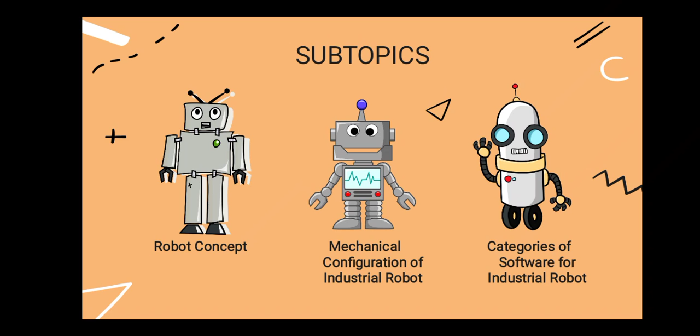Subtopics we will cover: robot concept, mechanical configuration, and categories of software for industrial robots.

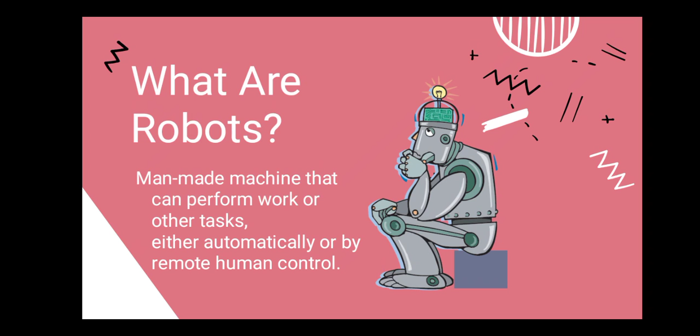First, let's talk about the concept of robots. What are robots? Robots are man-made machines that can perform work or other tasks, either automatically or by remote human control. It is also defined as a type of automated machine that can execute specific tasks with little or no human intervention and with speed and precision.

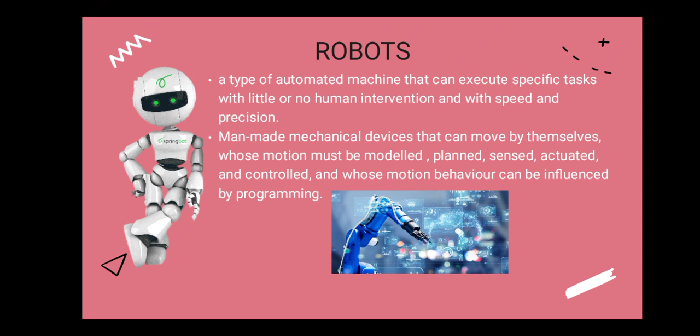Moreover, it is also defined as man-made mechanical devices that can move by themselves, whose motion must be modeled, planned, sensed, actuated, and controlled, and whose motion behavior can be influenced by programming.

Robotics is the science and study of robots. It is an interdisciplinary sector of science and engineering dedicated to the design, construction, and use of mechanical robots.

What is a motion control system? At the most fundamental level, a motion control system is any system that controls the energy flow to generate mechanical motion with some desired properties.

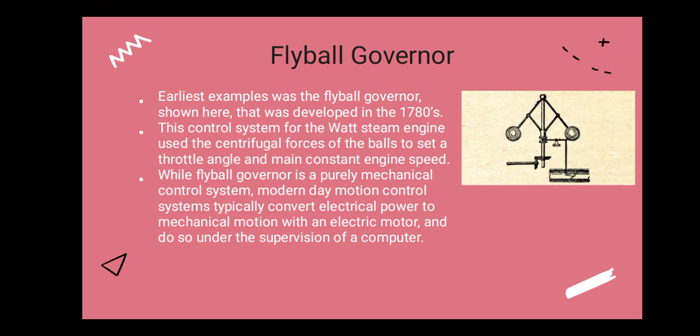The earliest example was the flyball governor developed in the 1780s. This control system for the Watt steam engine used the centrifugal forces of the balls to set a throttle angle and maintain constant engine speed. While the flyball governor is a purely mechanical control system, modern-day motion control systems typically convert electrical power to mechanical motion with an electric motor, under the supervision of a computer.

Now let's talk about the history of robots. In 1920, the word robot was invented by Karel Čapek. The word robot comes from the Czech word robota, which means forced work or labor.

So in 1920, the word robot first appeared in the drama written by Karel Čapek. The name of the drama is RUR, abbreviation for Rossum's Universal Robots, a company which plays a prominent role in the story.

The word robotics was first used in Runaround, a short story published in 1942 by Isaac Asimov. Isaac Asimov also proposed the three laws of robotics, and later added a zeroth law.

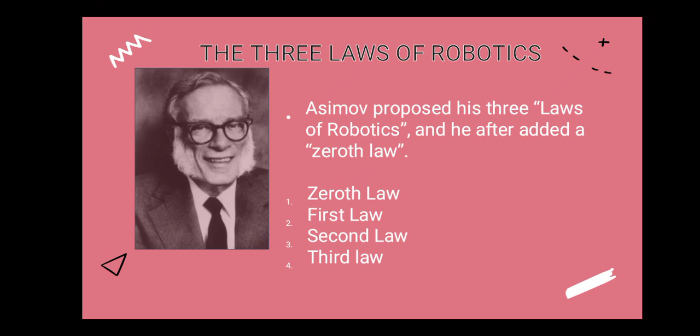Let's define these laws further. The three laws of robotics: first, the zeroth law - a robot may not injure humanity or, through inaction, allow humanity to come to harm. First law - a robot may not injure a human through action or inaction allow a human being to come to harm, unless this would violate a higher order law.

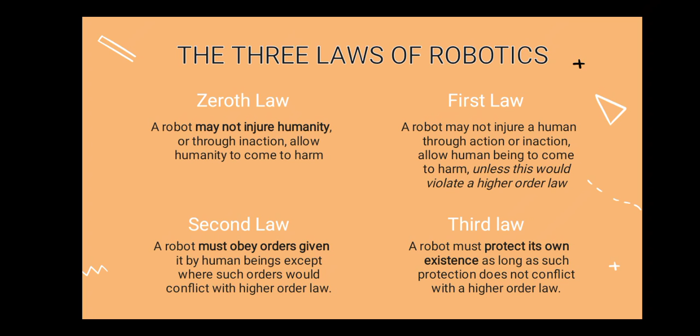The second law - a robot must obey orders given to it by human beings, except where such orders would conflict with a higher order law. And lastly, the third law - a robot must protect its own existence as long as such protection does not conflict with a higher order law.

In 1956, the real robot came into existence. George Devol and Joseph Engelberger formed the first robot company. After the technology explosion during World War II, in 1956, George C. Devol, Norman Schaeffler, and Joseph F. Engelberger made a serious and commercial effort to produce a robot. They started a firm named Unimation and succeeded in building the first robot, named Unimate.

Did you know that Joseph F. Engelberger is also known as the father of robotics?

Now let's talk about the first industrial robot, the Unimate. In 1959, the first robot prototype was developed, the Unimate number 1. It was first used in General Motors, basically to extract die castings from die casting machines and to perform spot welding on auto bodies, both tasks being particularly hateful jobs for people.

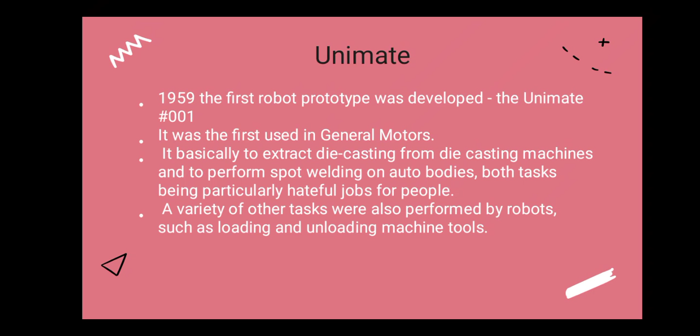A variety of other tasks were also performed by robots, such as loading and unloading machine tools. The Unimate started a revolution in the robotics industry, and many robots of its type were built for doing tiresome jobs for people. Robots offer specific benefits to workers and industries. If introduced correctly, industrial robots can improve the quality of life by freeing workers from dirty, boring, dangerous, and heavy labor.

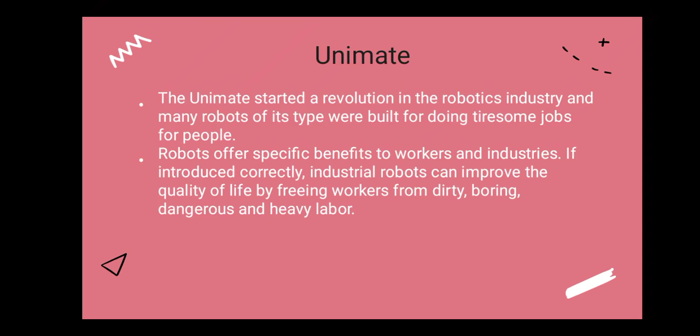By 1961, the Unimate 1900 series became the first mass-produced robotic arm for factory automation.

Mindful of the uphill battle he would face from manufacturers, and motivated by Asimov's three laws of robotics that relate to the first do no harm philosophy similar to the Hippocratic Oath, Engelberger focused on employing robots in tasks harmful to humans. This strategy worked, and in 1959, the 2,700-pound Unimate number 1 prototype was installed on the assembly line for the first time at General Motors' die casting plant in Trenton, New Jersey.

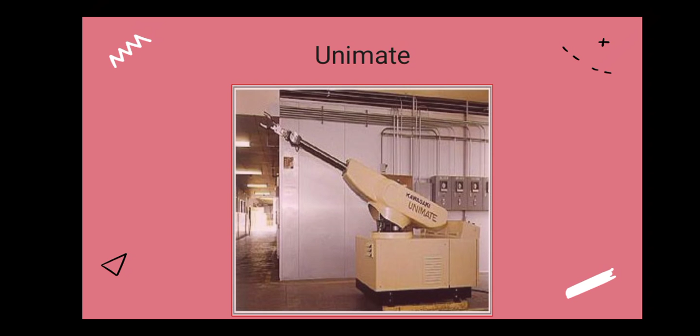By 1961, the Unimate 1900 series became the first mass-produced robotic arm for factory automation. In a very short period of time, approximately 450 Unimate robotic arms were employed in die casting. Here's a picture of Unimate.

Now let's talk about the common types of robots. We have autonomous mobile robots (AMRs), automated guided vehicles (AGVs), articulated robots, humanoids, cobots, and hybrids.

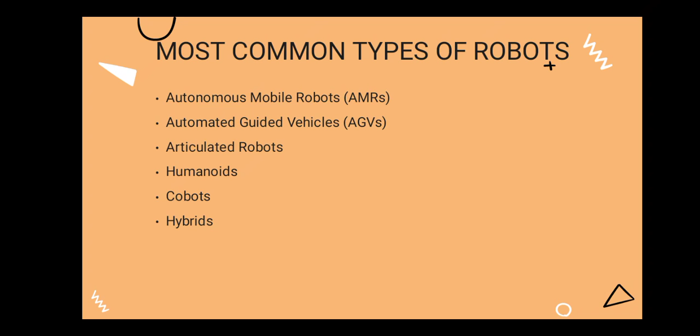This is what autonomous mobile robots look like, AMRs. AMRs move throughout the world and make decisions in near real time as they go. Technologies such as sensors and cameras help them ingest information about their surroundings. Onboard processing equipment helps them analyze it and make an informed decision, whether that's moving to avoid an oncoming worker, picking precisely the right parcel, or selecting an appropriate surface to disinfect. They're mobile solutions that require limited human input to do their job.

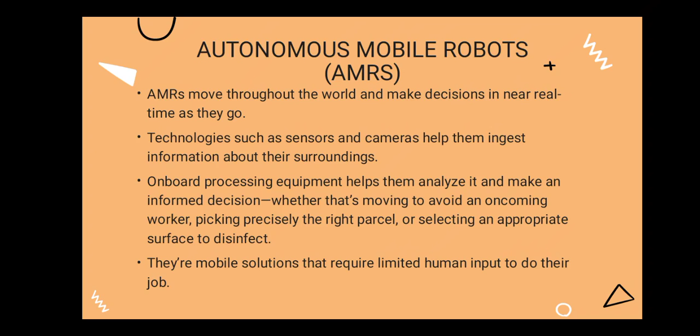Now let's talk about automated guided vehicles. This is what they look like, AGVs.

AGVs are defined as this: while AMRs traverse environments freely, AGVs rely on tracks or predefined paths and often require operator oversight. These are commonly used to deliver materials and move items in controlled environments such as warehouses and factory floors.

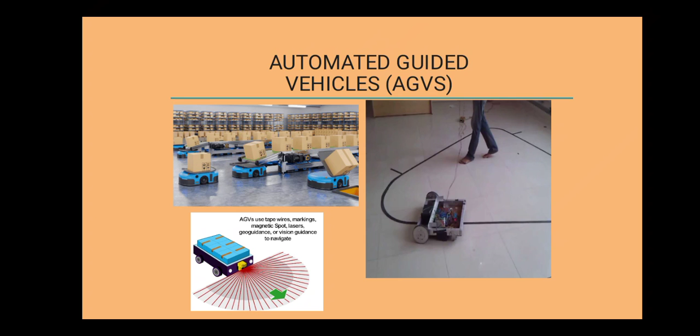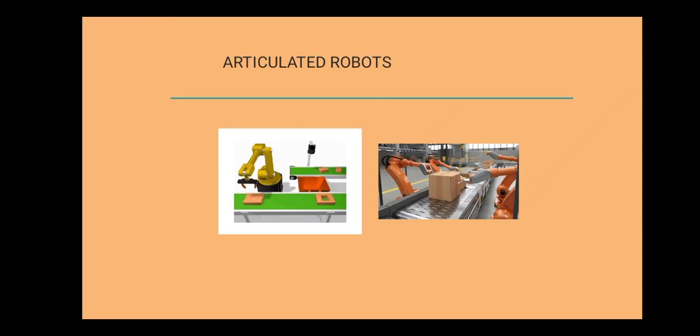Now let's talk about articulated robots. Articulated robots, also known as robotic arms, are meant to emulate the function of a human arm. Typically, these can feature anywhere from 2 to 10 rotary joints. Each additional joint or axis allows for a greater degree of motion, making this ideal for arc welding, material handling, machine tending, and packaging.

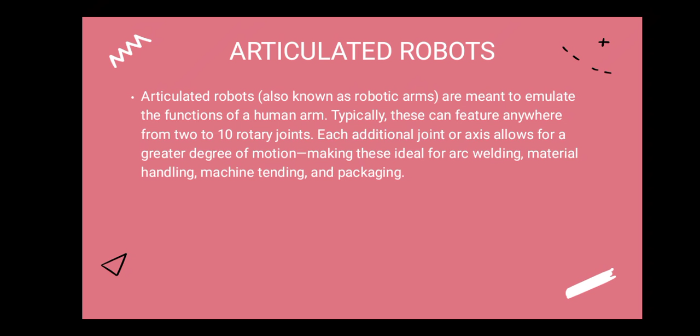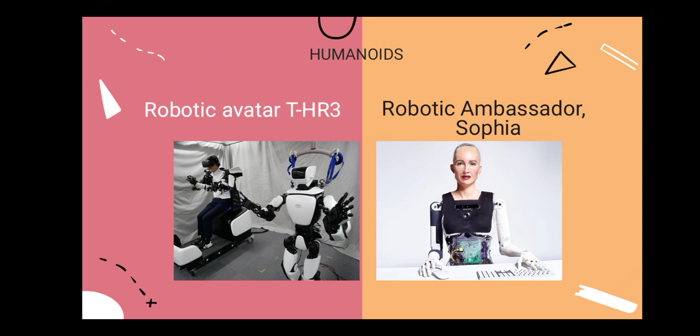Now let's talk about humanoids. Here are examples of humanoids: the T-HR3, Sophia, the SoftBank Robotics Social Humanoid, and Digit, a headless humanoid with nimble limbs that helps in their work.

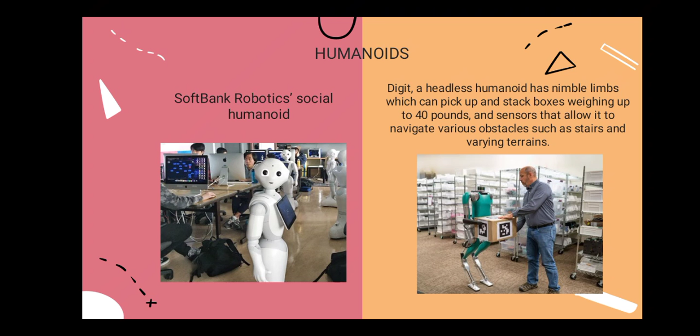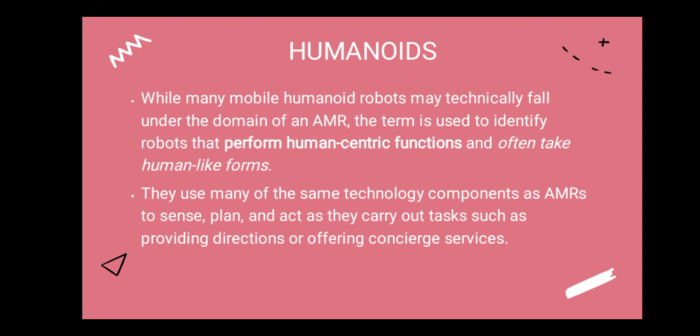Let's define humanoids. While many mobile humanoid robots may technically fall under the domain of an AMR, the term is used to identify robots that perform human-centric functions and often take human-like forms. They use many of the same technology components as AMRs to sense, plan, and act as they carry out tasks such as providing directions and offering concierge services.

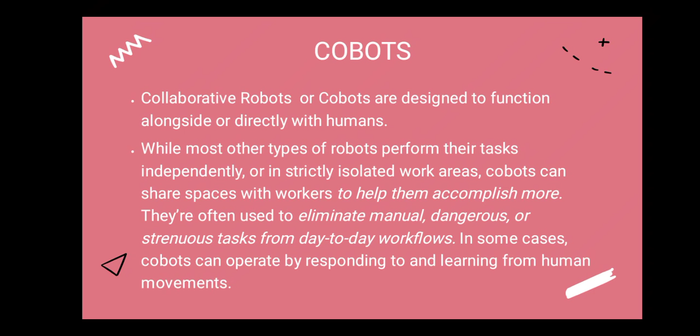Now let's talk about cobots. Collaborative robots, or cobots, are designed to function alongside or directly with humans. While most other types of robots perform their tasks independently or in strictly isolated work areas, cobots share spaces with workers to help them accomplish more. They're often used to eliminate manual, dangerous, or strenuous tasks from day-to-day workflows. In some cases, cobots can operate by responding to and learning from human movements.

Now let's talk about hybrids. The various types of robots are often combined to create hybrid solutions capable of more complex tasks. For example, an AMR might be combined with a robotic arm to create a robot for handling packages inside a warehouse. As more functionality is combined into a single solution, compute capabilities are also consolidated.

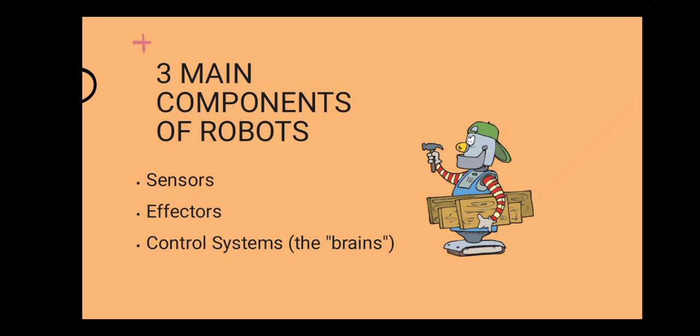Now let's talk about the three main components of robots. We have the sensors, effectors, and the control systems or the brain of the robot.

Let's talk about the sensors. Sensors allow a robot to gather information about its environment, which is used to guide its behavior. So, sensors like camera, microphones, thermometer, barometers.

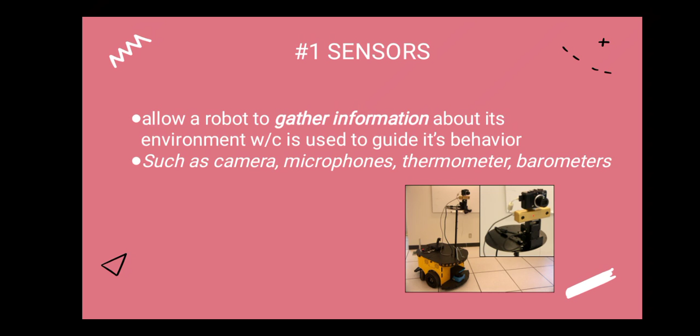There are also sensors that are more complex and can give more capabilities, such as the LiDAR, or light detection and ranging sensor, which use lasers to construct 3D dimensional maps of their surroundings as they navigate through the world. The cheaper way to achieve this same goal is ultrasonic sensors, which only use high frequency sound instead of lasers.

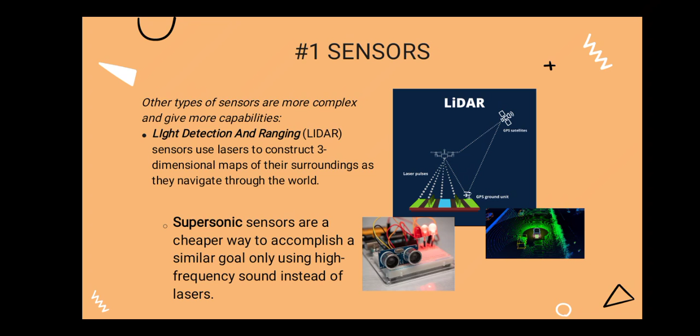Other types of sensors are more complex and give more capabilities. Some robots come with specialized sensors such as accelerometers and magnetometers that allow the robot to sense its movement with respect to the Earth's gravity and magnetic field.

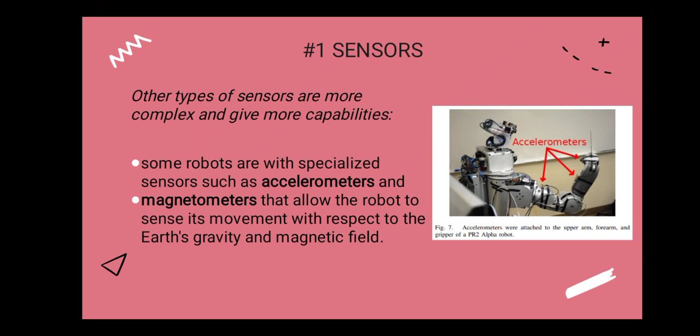Now, let's talk about the second component of robots, effectors. Most are specific to the tasks that you want your robot to do. Here's an example: Mars rovers have tools like hammers, shovels, and a mass spectrometer to use in analyzing the soil of Mars. So these are the effectors.

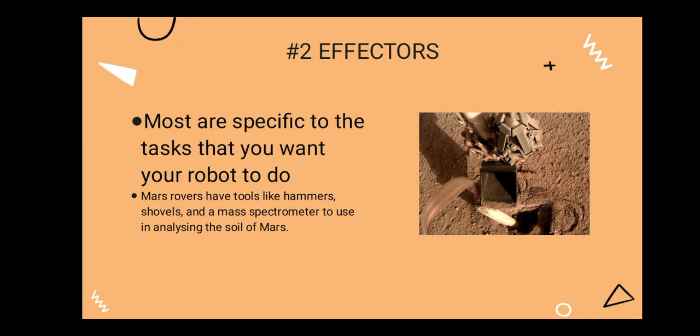Effectors are the parts of the robot that do the work. Effectors are tools that you can mount on your robot and control with the robot's computer.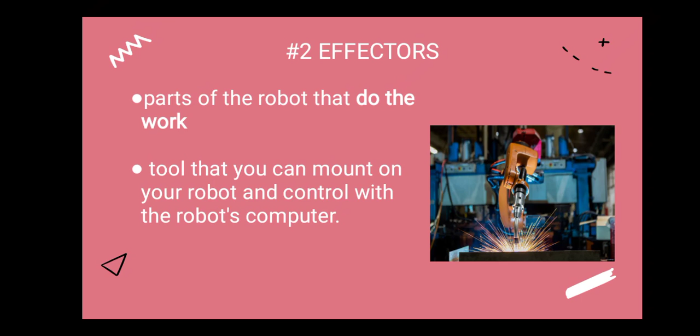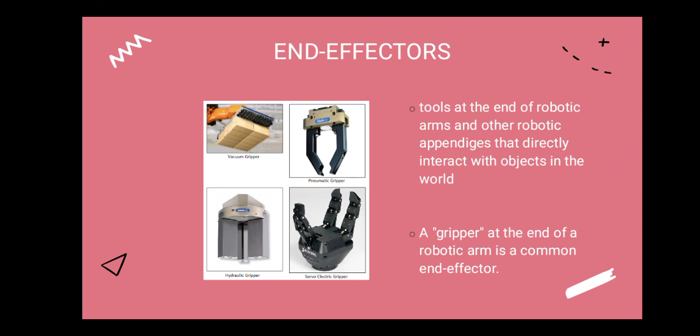Common effectors include end effectors, motors, and speakers. End effectors are tools at the end of a robotic arm or other robotic appendages that directly interact with objects in the world. A gripper at the end of a robotic arm is a common end effector.

Other examples include spikes, lights, hammers, and screwdrivers. Medical robots have their own specialized effectors, such as tools for cutting in surgeries and suturing incisions.

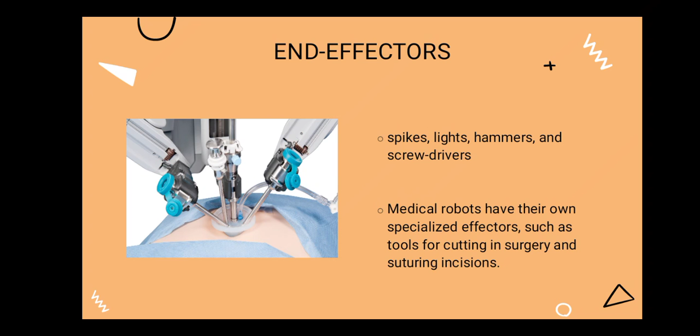Motors can be used for many moving parts of a robot, from joints on robotic limbs to wheels on robotic vehicles to flaps and propellers on robotic airplanes. Pneumatics and hydraulics are another way of moving parts of the robot, particularly where the robot needs a lot of strength to perform particular tasks.

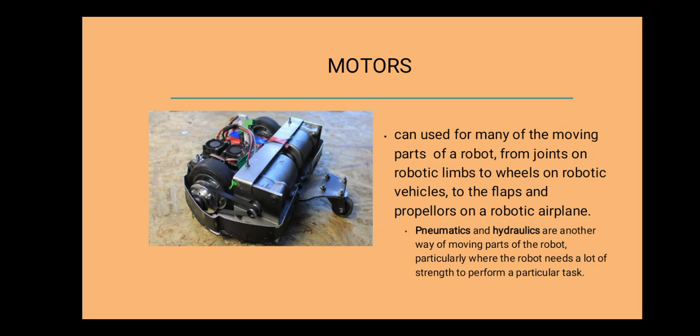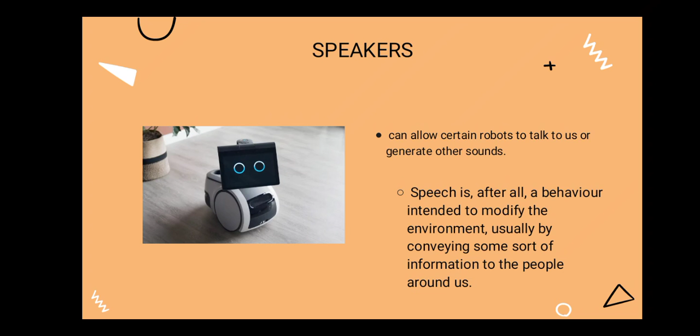Speakers can allow certain robots to talk to us or generate other sounds. Speech is, after all, a behavior intended to modify the environment, usually by conveying some sort of information to the people around us.

Now let's talk about control systems. Control systems are the brains of the robot, the part of the robot that determines the robot's behavior. These regulate and command the functions of the robot in order to achieve desired results.

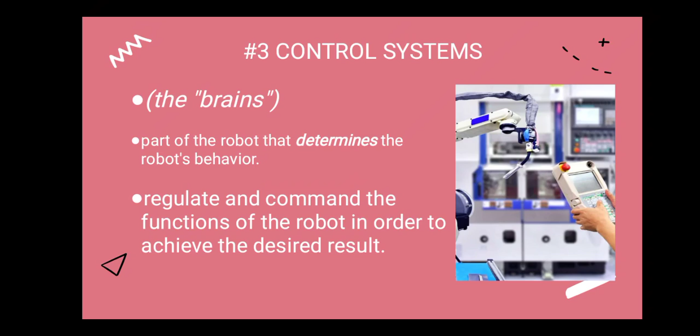There are two kinds of control systems: pre-programmed robots and autonomous robots. In pre-programmed robots, the very simplest programmed robots merely repeat the same operations over and over, while autonomous robots are more complex robots that are able to respond appropriately in environments that are much more complicated.

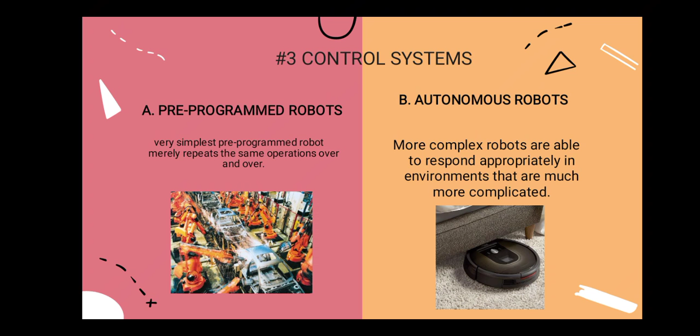Pre-programmed robots are insensitive to changes in the environment, or can detect only very limited information about very limited parts of the environment. They also require little in the way of controls, but will perform properly only if the environment behaves in accordance with the robot's pre-programmed actions.

On the other side, autonomous robots have sensory apparatus that allows them to detect changing features of the environment, and a range of behaviors that will allow them to respond to those changes. Whatever features of the robot enable it to adapt its behavior to its environment, we call the control system.

Now let's talk about the advantages and disadvantages of robots. The advantages are that they can go to faraway planets, go down into unknown waters and mines where humans would be in danger. They can also give information to humans that humans can't get, and they can work at places 24/7 without any salary and food. Plus, they don't get bored.

Moreover, they can perform tasks faster than humans and much more consistently and accurately. Most of them are automatic, so they can go around by themselves without any human interference.